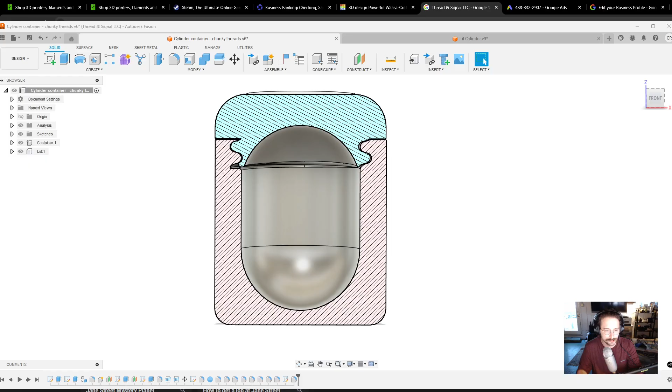So, what you're going to need to start with is an open mind and an ability to unlearn everything that you know, because there's a lot of information out there that is incorrect. The first is that there's too small of threads or too big of threads, and that there's only a certain size that can work and things like that. And that might be true based on the incorrect usage of certain people.

But what I'm going to really teach you here today is form shapes so that they fit within another and also fit relative to the 3D printed geometry and layer lines. So how this is going to work, we are going to first correct this design.

So I like to give a basic overview of Fusion's thread tool here first. It's a very useful tool. It is basic though, and it is kind of limiting in the sense that it's basic, but it's also going to give you threads that will work in most situations and that are pre-made, and it's going to take a lot of time out of things unless you absolutely need it to be perfect, such as a case like this one that's a custom triple lead thread jar, which I'm also going to show you guys the design on, or how to make that.

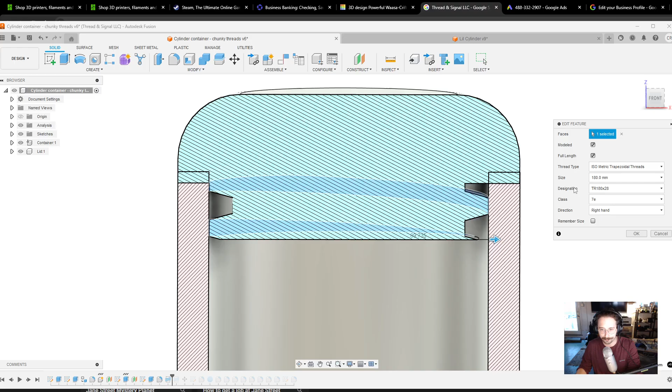Okay, so the first thing that we're going to do is select a thread design here. So the TR180x28, that's the diameter of the threads themselves. So in this case it's a 180 millimeter diameter, and these are 28 millimeter lobes on these threads. So I like them big and chunky in this case. And we're going to select OK on those threads there. And we're going to bring this object all the way back to the full timeline.

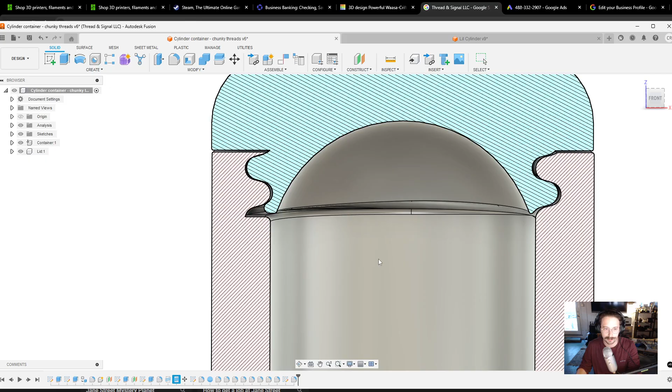These threads are on the interior of the container, so you can see this is the interior of the container. We're actually going to delete those threads. So we are not going to use two sets of threads. We're going to make one set around the other. So we are going to delete this move tool here as well. And you might wonder to yourself, like, oh no, what have we done? This is all out of whack now. And no, it's not. I'm going to show you why.

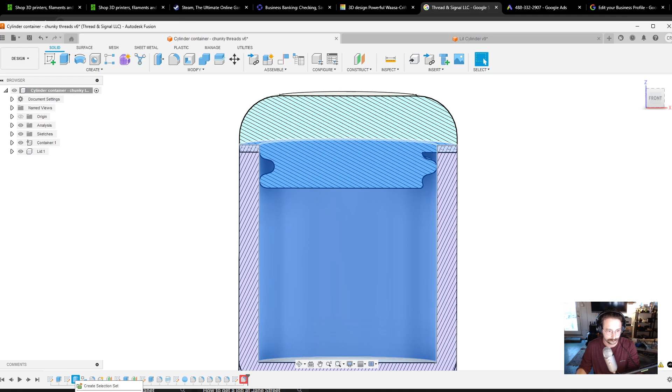Okay, so we're going to increase this wall thickness to about 35 millimeters. That's pretty good for eyeballing it, wasn't it? It's because I didn't eyeball it. I measured it beforehand. But okay, so we're going to delete this off here. I'm going to do this wrong intentionally up front to show you guys just the basic operation, but then I'm going to correct it to show you the way to do this.

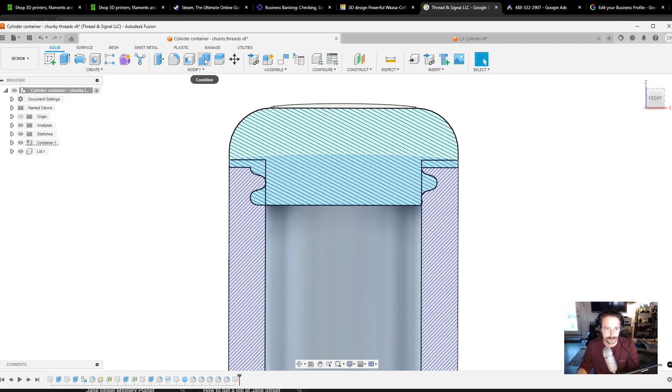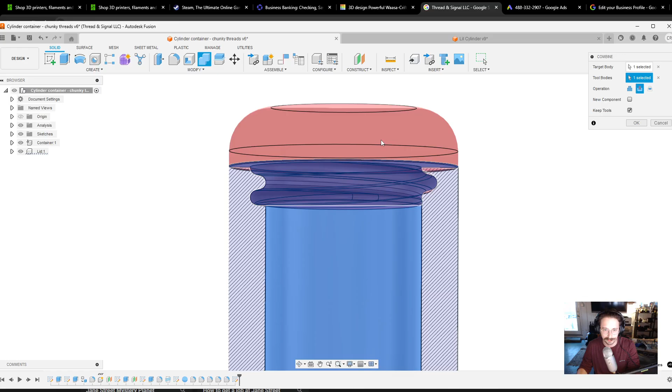So when we do the combine cut operation, we select our target body, which is the thing that we're cutting into, right? Then we select our tool body, and that is the thing we are cutting with. So you'll see that the lid disappears because it's showing what it's cutting in this case, and you'll see that it's cutting that thread shaped space into the container. So we're going to click OK, and we're going to click Keep Tool specifically, so it's going to keep this after it does the operation, and we see that we have perfectly cut threads.

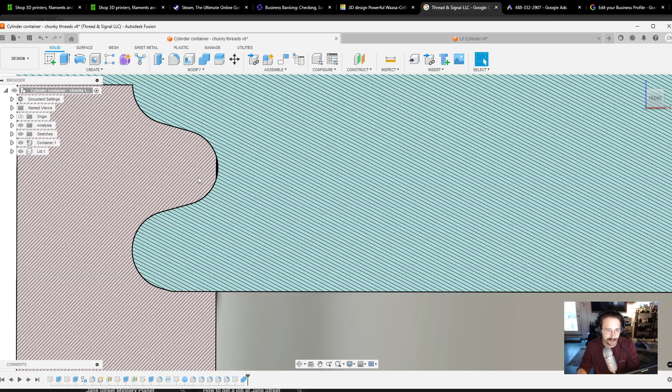And in a perfect mathematical world, this is great, but the problem is that we have to account for the reality of 3D printing, which is that there's layer lines and thermal contraction inaccuracies and all kinds of dimensional instability that arises from this process, right? So what we're going to do here, we're actually going to increase this 1 little millimeter. Here we go.

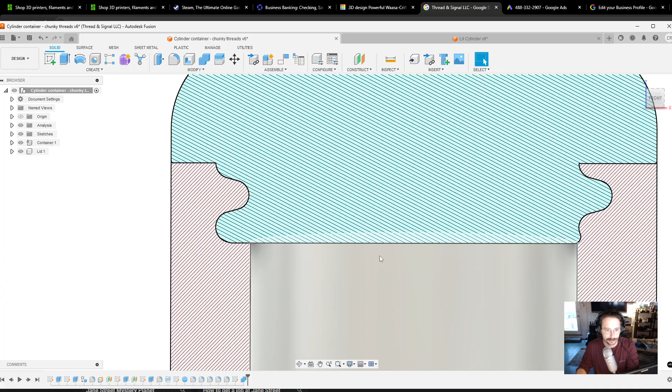There we go. That's money. Okay. All right. So the reason I did it wrong is that you can see that this is sharp like a blade right here. If you printed this, it would be like one layer line. You might cut yourself if this is like nylon or something, right? So we don't want that. That doesn't look good. And even if we turn off the sectional analysis here, we can see it looks weird. It looks bad.

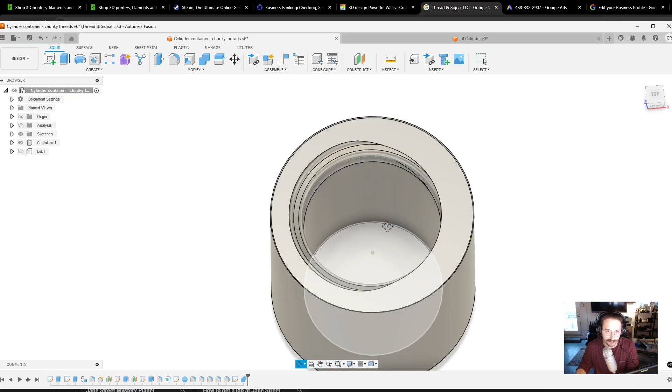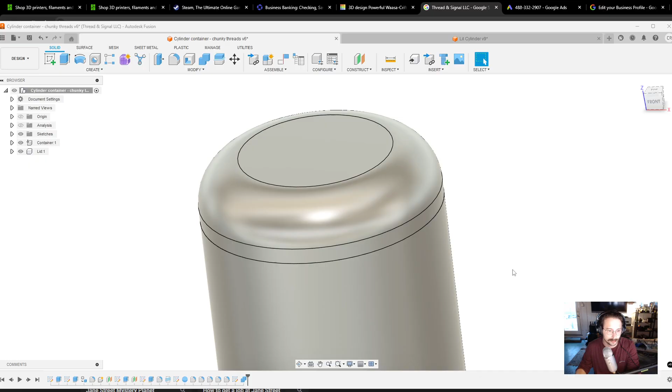Now you might think to yourself, oh yeah, we're just going to fillet this bad boy out, right? And it'll look okay. You could do that, and that's perfectly okay. Honestly, you could do that, but there's a better way to do things, so we're not going to do that, okay? So what we're going to do is go to the lid, and go back to the combined cut operation here.

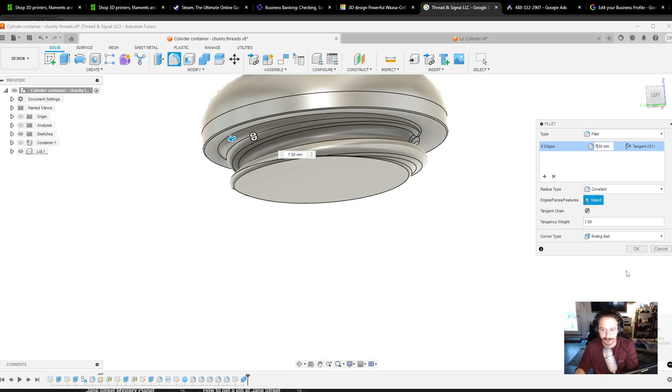I'm going to open the analysis again, and we're going to turn off the container, and here we go. We're going to make sure that we've got the whole thing. Yes, we do. Okay, we're going to fillet this part on the lid specifically. We're going to go as much as it can go. We'll say 7. And that makes sense because these were 28 millimeter lobes.

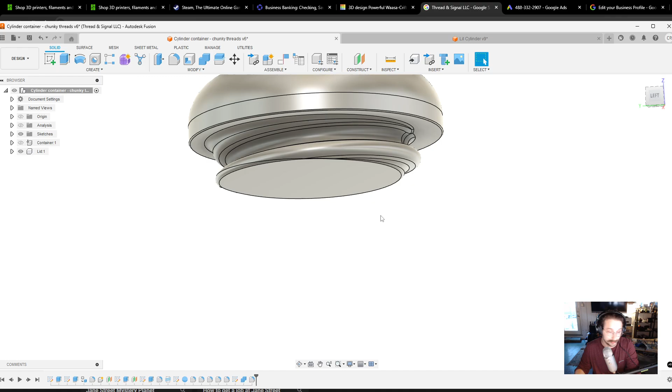That's a quarter. Filleting by about 1/4 for the leading edge is pretty close to mathematically what you want, according to ChatGPT and some engineering book that I read. I don't know if that's true. Might be. But what I do know is this is going to be buttery smooth when this goes together.

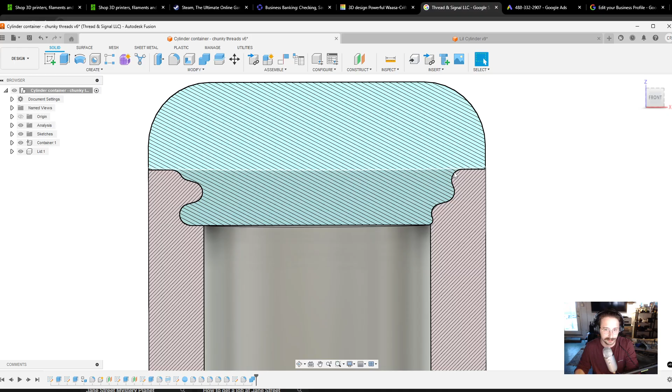So we click container here. Let's put our fillet before that edge so that it actually shows us. Here we go. As we can see, it has greatly rounded out this edge here as well. And you might be concerned, is this going to have a little bit less holding force, things of that nature? Probably marginally so. If you're really that concerned with that, you can reduce the fillet amount, but

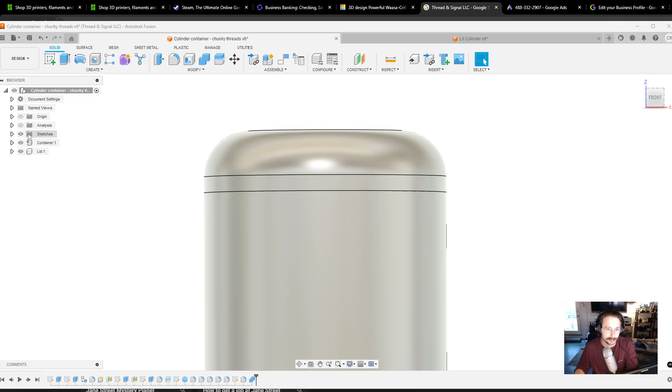I don't recommend reducing the fillet amount because when we undo this analysis and remove the lid, we can see that that edge is perfect. It's pretty close to darn circular, which is hard to do with a single lead thread because it's an asymmetrical object, right? That brings us to our next theory.

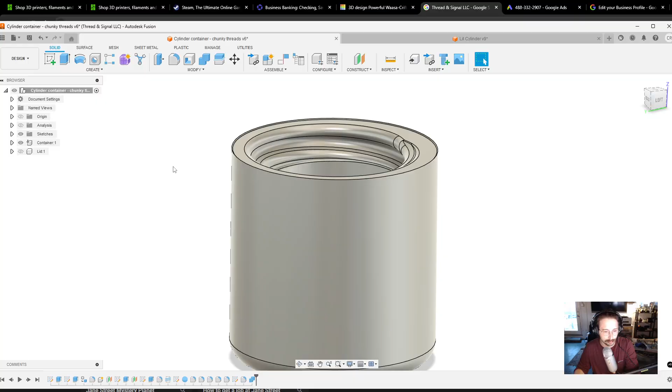Well, before we get to our next theory of more threads, we're going to get to what we need to do in order to take this perfect shape and make it a really printable object. And that's with putting offsets on each side of the combined cut operation. So we're going to turn off the combined cut operation by going one step beforehand, and we're going to bring up our analysis here again.

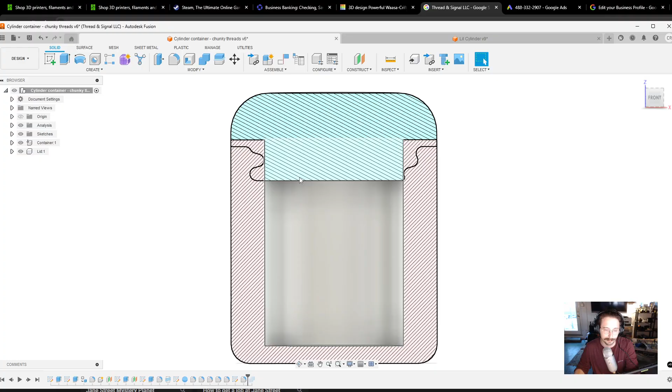We're going to see that we're not combined anymore. We're not cutting into this object. So we're going to make this container go away. We're going to bring everything into view here so we can select all of the faces. I'm going to select the whole object because it doesn't really matter in this case. If you have a precise use case, you could do the thing where you select each face.

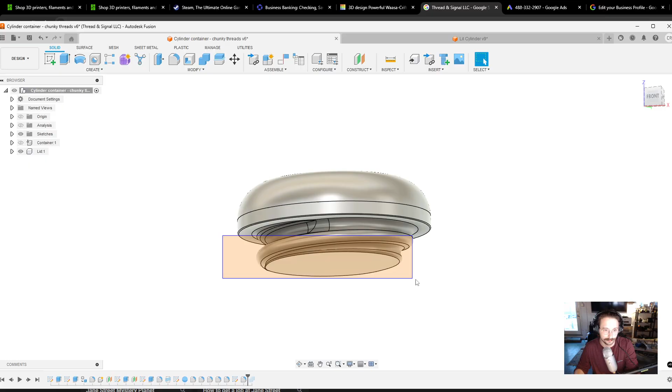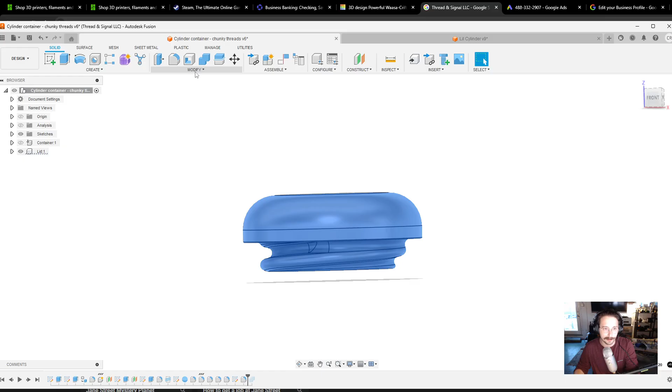It can be tedious, and sometimes it can determine if this offsetting operation actually works. So a lot of times the easiest way to do it is just to select the whole object because it has a lot easier time that way. Okay, so I'm going to offset this out. I typically do this by about 0.4 millimeters.

You can do 0.2, which is going to give you a nice snug fit. The parts will go together on their first try without any post-processing with 0.2, but it's going to take a few twists of the lid to get it nice and smooth. 0.4 millimeters is just going to glide, it's going to feel really nice in the hand. This is 0.4, and this is actually annealed polycarbonate as well. So just to give you an example of what you're able to do. So let's see here. We're going to do the 0.4 millimeters.

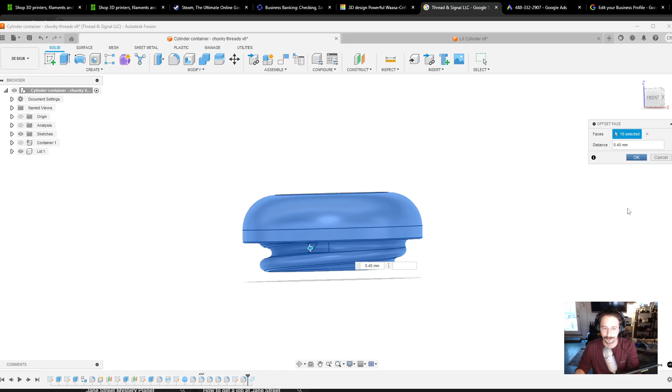And then we're going to go to the end of our thing here, and then we're going to re-offset the face.

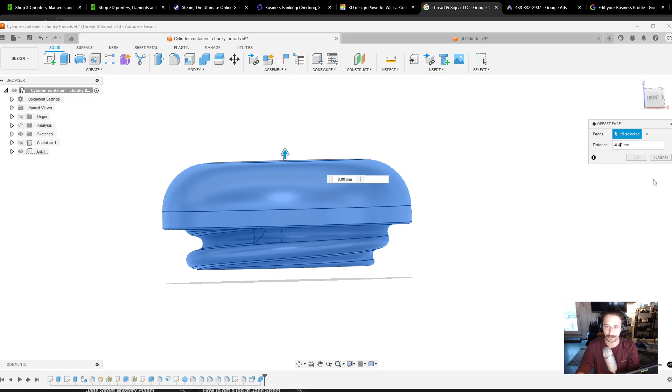We're going to select the whole thing again, and then we're going to go negative 0.4 millimeters. What that's going to do is offset the face perfectly within the object itself.

So what you're going to see is that there's this nice space here. See that? Pretty nice, huh?

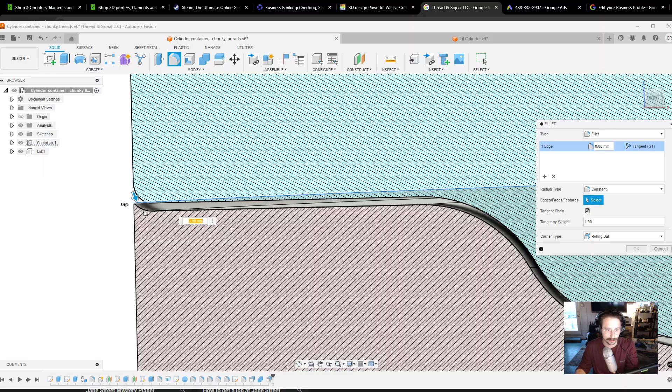Now, if you really had an issue with something like that, honestly, you're going to have to fillet this edge anyway, so you could just fillet that out of the equation if you really had a problem with it.

And then you could just extrude this face back up. So here we go, we could extrude that up by 0.4 millimeters. There we go.

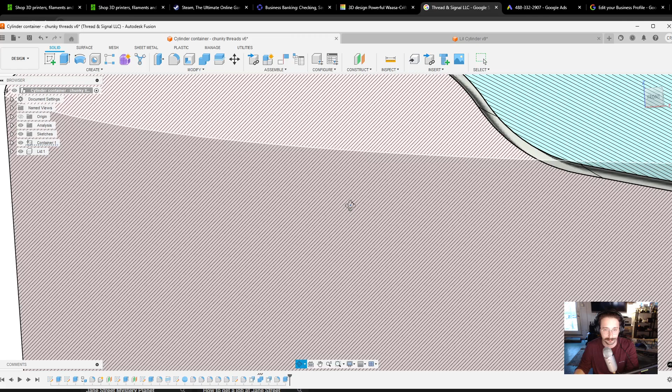This is if you needed this thing to be airtight, and then you were going to add an O-ring thing there. I could keep going, and then you'd fillet this here. Whoops, no you wouldn't, all right just kidding. You didn't see that, but we're going to get rid of that.

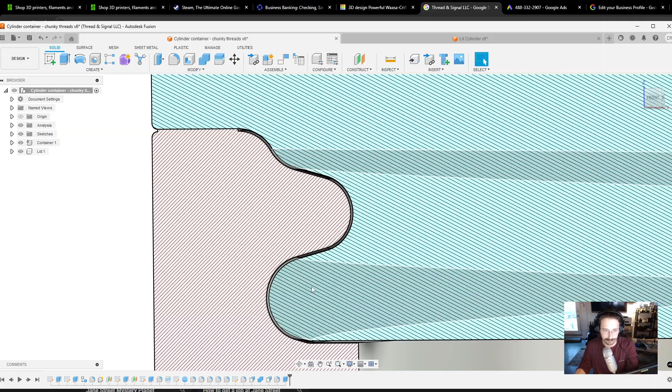I could keep going, but basically you see the idea is to make a perfectly molded thread around the object.

And then combine cut, and then offset that back just a little bit to the original size that it was, and that's what makes your nicely offset threads.

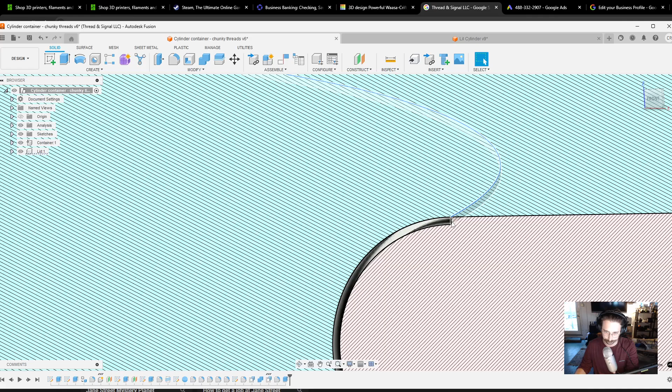Interesting. Okay. Well, cool.

All right, I'm fixating on that one a little too much, but I could show you some other thing, just to give you an idea.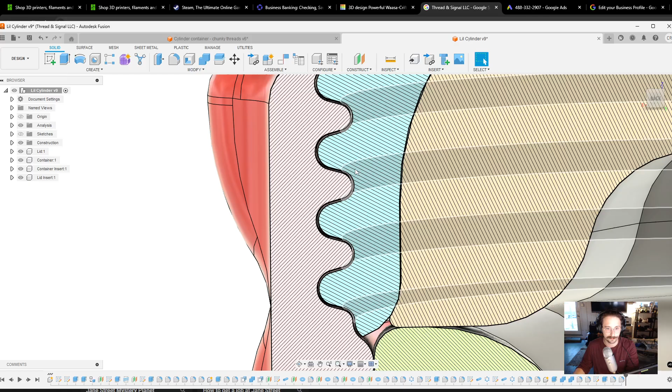This process, like this is a relatively complicated product, or more complicated jar design, but this uses the same premise as well, just to give you an idea there.

So there's one other thing that I'll show you.

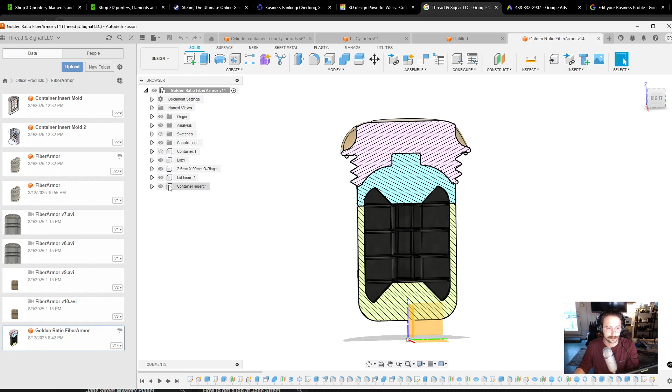And that is the triple lead thread. As you can see, we use the same kind of design here with offsetting the threads, but these threads are a little bit different.

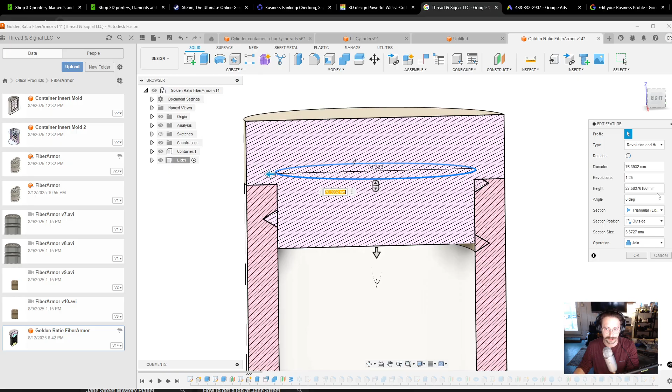The reason why is that we have used a coil tool, and you can see that there is some pretty specific math that goes into doing this.

It really is kind of just guess and try again kind of thing. But also I'm sure there's some math to it that someone smarter than me can figure out, and hopefully leave a comment and share with everybody, or don't share it and get rich off of it, because, you know, why not?

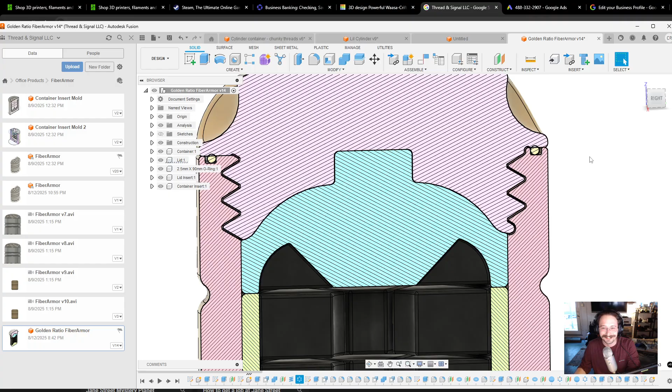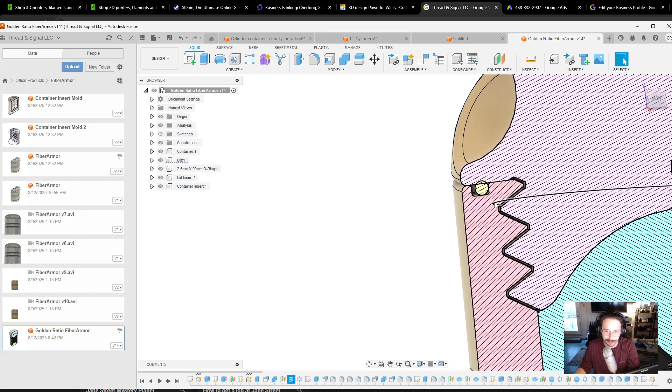Okay, so what we're going to do with this operation is show you what a triple lead thread should ideally look like, and the reason you would do it, first off, is that whenever you have something like an O-ring seal, as I mentioned before, you are going to have something that ultimately needs to have even compression from all sides.

And a single lead thread is going to have one side where it presses down a lot more firmly than the other, creating an uneven seal.

A double lead thread will have less of that issue, but it will rock on 2 certain points. And then the first stable design is a triple lead thread.

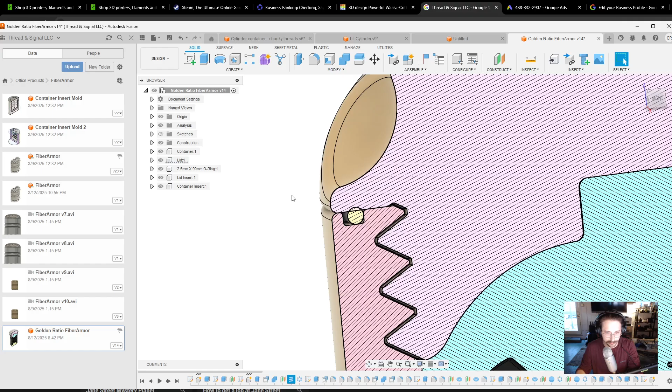The other thing about that is it actually increases travel distance per amount of thread bearing face. So this turns about 3 times faster than it would if it was just a single thread.

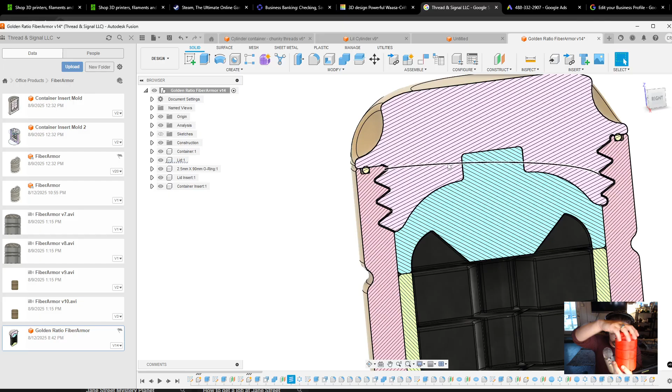By turns 3 times faster, I mean you're getting 3 times the travel distance this way for each revolution. So even though it looks like there's a ton of threading on this lid, in reality it's only about a little bit less than 1 full revolution for the turn of the lid in this case. So that kind of gives you an idea of what you can do with designs like that.

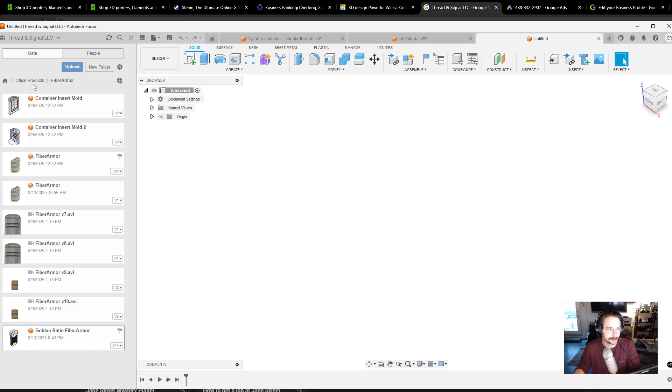Now I want to show you how you can use the combined cut operation in order to make something like a mold. So what I'll do is go back to Office Products, go to stress ball, and you'll see this does not look like a stress ball because it is a mold for a stress ball. So I will bring the stress ball back here, and I will make one of the halves go away.

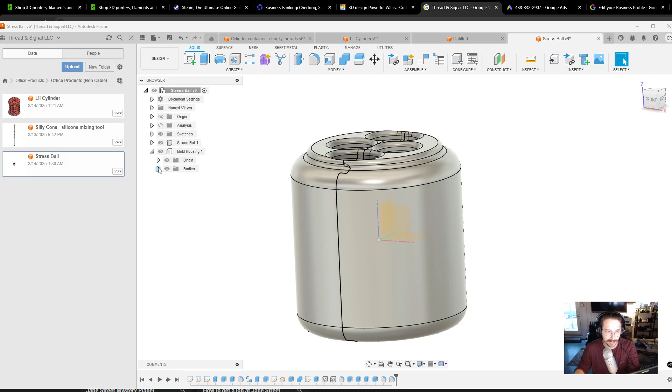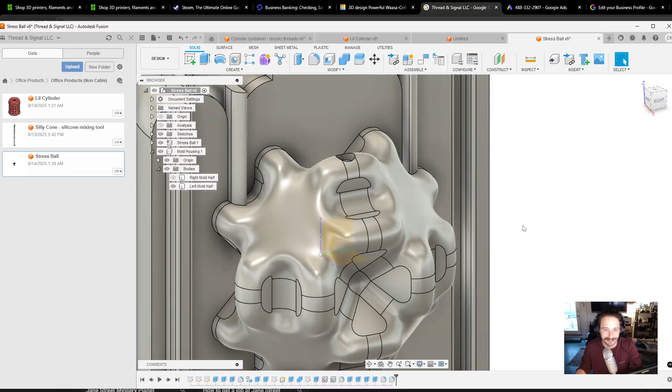Here we go. So this is my funky chunky design for a stress ball. It's super fun. I'm not going to tell you how I made it because you could probably figure it out if you're halfway good at math. But it's really nothing special. Basically what you do is you make multiple holes here, and you use those as ventilation holes. I guess the first thing you do is start with your stress ball, or whatever it is that you're trying to mold.

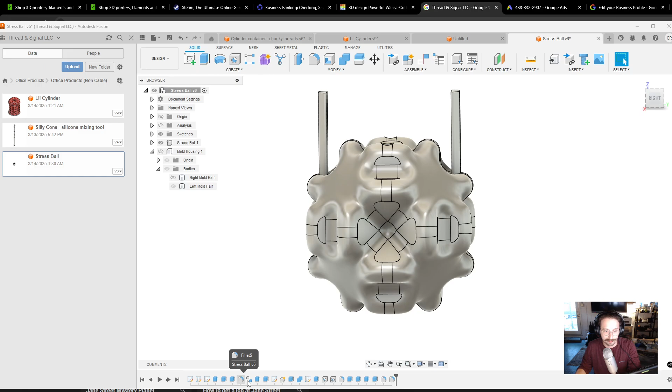And then you use a combined cut operation. So we see combined cut right here, and that is what we use. I guess let me teach you guys here.

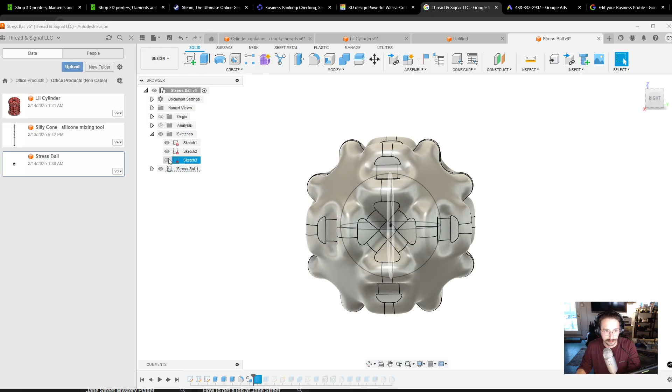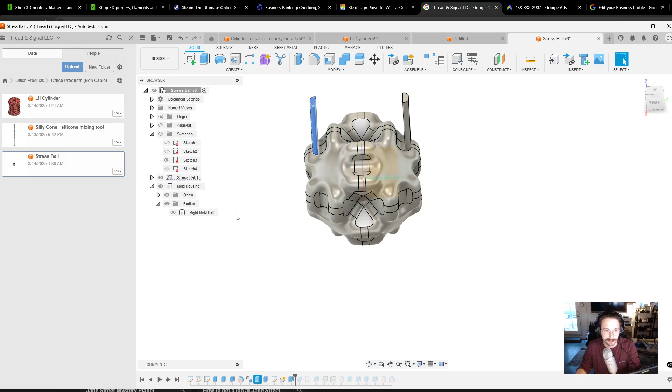Okay, so we have our stress ball, and then we would make a circular sketch that we would then extrude into a new component. That new component would just be a cylinder, and then we would combine cut inside of that cylinder to get our object out. So they are now two different objects.

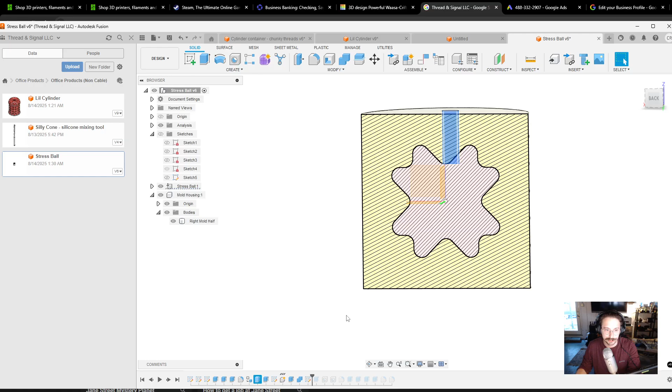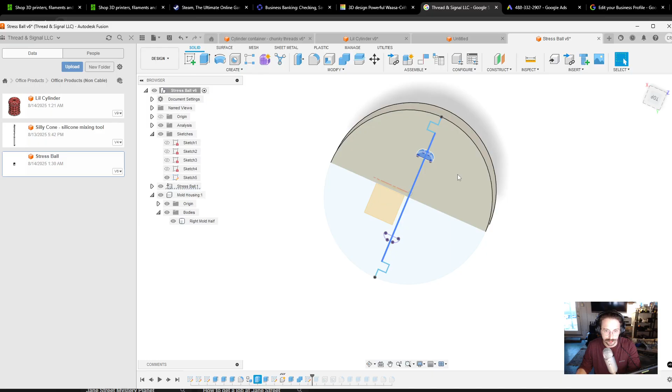Then we would use the creation of another sketch there in order to extrude. Making a sketch like this, so you can see it's basically a line, but it has two teeth, and extruding this sketch down as a cut. So that then turns this mold into two halves that interlock via the teeth.

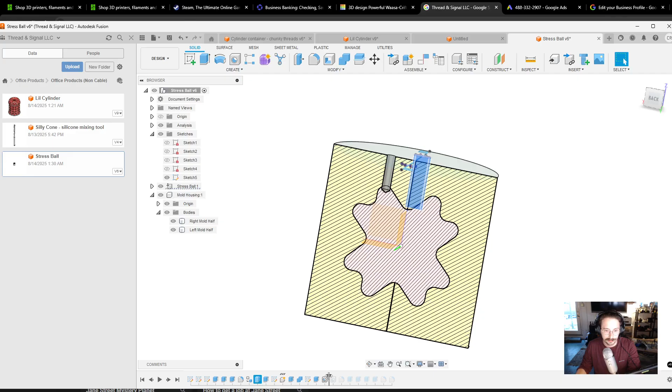And I added two holes as well, just for ventilation in this case. I could have just made a hole in a rectangular pattern or something of that nature, but honestly I just hit the hole tool twice. It really takes 2 seconds.

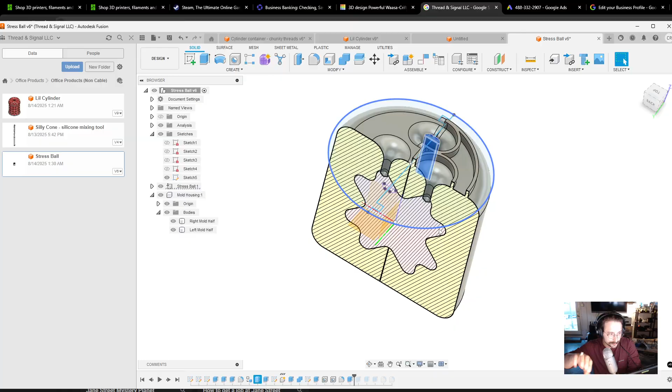And then I filleted the edges up. I used, here's another tip for making molds that I've learned as well too: if you do a shell extrude around the holes, you lose a lot less stuff, a lot less silicone or whatever it is that you're pouring in these cases.

Also, big disclaimer with these molds: if you're using anything that's hot, you better know what you're doing. Do not try that at home. This is for silicone, and for people who know what they're doing, and for grown-ups and stuff. So if you're a kid, don't do this. Or actually, I shouldn't say don't do this — I should say go get your grown up and have them help you with this, and have a fun project with them, but with your grown up.

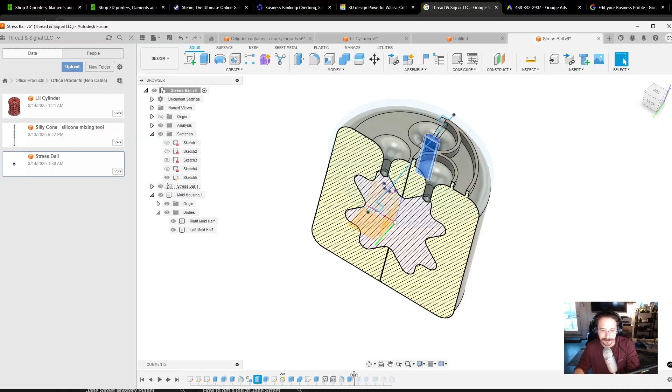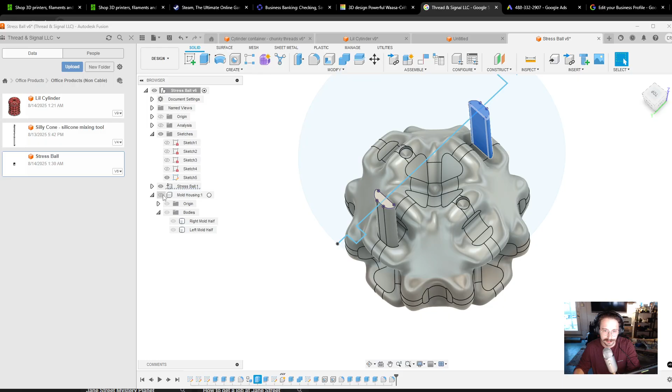Okay, and anyway, after you shell extrude all that stuff there, you can then fillet over the edges, make everything look nice, and voila, that is my mold design here. And that's what it'll look like on the inside.